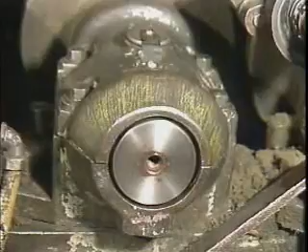Whenever movement takes place between surfaces that are in contact with each other, friction, or resistance to the movement, occurs. Friction between the moving parts of industrial equipment can cause excessive heat and wear. So lubrication is used to help reduce and control friction.

Lubrication is the act of applying a substance called a lubricant that creates a slippery barrier between surfaces that would otherwise come in contact. In this part, we'll look at some of the types of friction that can occur. We'll also look at different kinds of lubricants and describe various levels of lubrication.

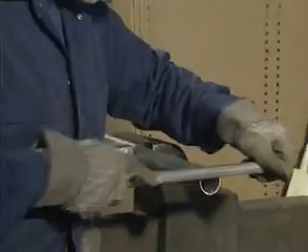Moving parts generally experience one or more of three basic types of friction: sliding, rolling, and fluid. Sliding friction occurs when one surface slides across another. This type of friction offers the most resistance to motion, so machines are usually built to minimize or eliminate it.

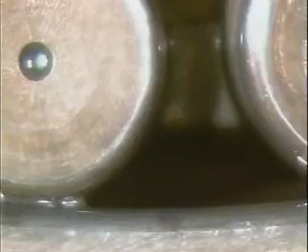One way of building a machine to minimize sliding friction is to place rolling elements between the moving surfaces. This is the principle behind rolling contact or anti-friction bearings. Although rolling contact bearings are used to reduce sliding friction, they do experience another type of friction, rolling friction.

Rolling friction is the resistance to motion that occurs when one object rolls over the surface of another. Rolling friction is considerably less severe than sliding friction, but rolling contact bearings must still be properly lubricated to reduce heat and wear.

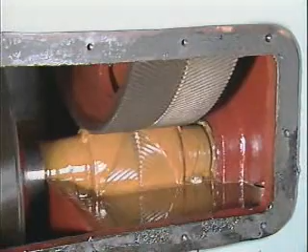Another way to reduce sliding friction is to separate two sliding surfaces with a film of lubricant. As long as the surfaces don't touch, sliding friction is eliminated. Some fluid friction exists within the lubricant, but it's much less than the sliding friction.

Fluid friction is the resistance to motion that exists in a fluid. For instance, fluid friction is what makes it difficult to walk rapidly in deep water. Three common kinds of lubricants are liquids, greases, and solids.

Liquid lubricants are oils. Mineral oils, which come from refined crude oil, and synthetic oils, which are man-made compounds, are commonly used in industrial applications. Greases aren't strictly liquid or solid. Instead, they typically soften when the temperature rises and stiffen when the temperature falls.

Solid lubricants are made from substances that retain their shape under normal conditions. Solid lubricants include some forms of metal, such as molybdenum disulfide, and several solid chemicals, such as graphite. When they act as a lubricant, the solid materials create layers that slide over one another. This reduces the friction that would occur if metal parts were in direct contact.

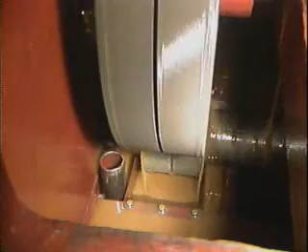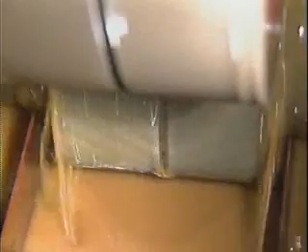Solid lubricants, such as the material whose trade name is Teflon, are also used as chemical coatings that prevent metal-to-metal contact by providing a solid covering for a metal surface. Chemical coatings are generally used in combination with another kind of lubricant. For example, if an oil film breaks down and allows two surfaces to come in contact, the chemical coatings provide backup lubrication.

Different levels of lubrication are possible. One level is no lubrication. When there's absolutely no lubricant between moving surfaces, the surfaces are dry. This condition causes the maximum friction between moving surfaces and should be avoided as much as possible, except for applications such as braking, in which maximum friction is desired.

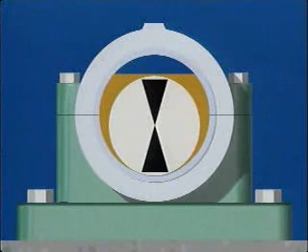Mixed film lubrication occurs when the mating surfaces are only partially lubricated, and metal-to-metal contact occurs between the high points of the surfaces that are moving across each other. Part of the load is relieved by the lubricant, but the high points of the mating surfaces take most of the load, which results in friction and wear of the surfaces. Mixed film lubrication is by no means an ideal situation, but it is a common occurrence.

A third level of lubrication is film lubrication, also called full film lubrication. It occurs when moving and stationary surfaces are separated by a film of oil. Film lubrication is the preferred level of lubrication for bearings. To see the basics of how film lubrication works, we'll use this illustration of a plain journal bearing.

The bearing has a sleeve that surrounds a shaft. The space between the bearing and the shaft contains lubricating oil. While the shaft's at rest, the weight of the shaft squeezes most of the oil out from between the shaft and the bearing. This places the bearing and the shaft in metal-to-metal contact.

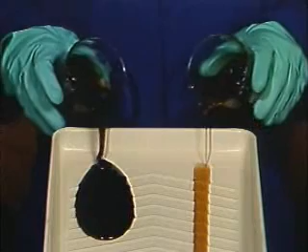The thicker lubricant has a greater resistance to flow, so it has a higher viscosity, while the thinner lubricant has less resistance to flow and therefore a relatively low viscosity. The thinner the lubricant, the lower the viscosity.

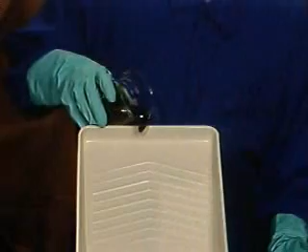Viscosity is affected by temperature. Higher temperatures cause lower viscosity because lubricants thin as temperature increases. On the other hand, lubricants thicken as temperature decreases. Both cases are significant because a lubricant won't lubricate properly if it's either too thick or too thin.

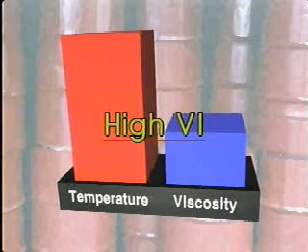If a lubricant is used where large changes in temperature occur, the lubricant's viscosity index is important. The viscosity index is a measure of the lubricant's viscosity change in relation to temperature change. If, when temperature changes a large amount, the lubricant's viscosity changes a small amount, the lubricant has a high viscosity index, or VI.

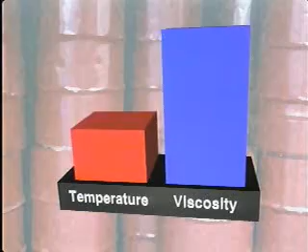If, when temperature changes a relatively small amount, the lubricant's viscosity changes a large amount, the lubricant has a low VI. Consequently, the temperature at which the viscosity measurement was obtained must be stated. This information is important because the same lubricant will have different viscosities at different temperatures.

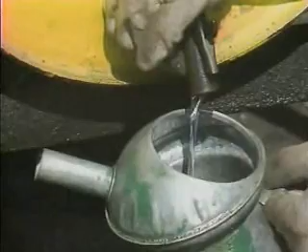In addition to viscosity, several other properties that affect lubricant performance are used by manufacturers as they develop lubricants for various applications. One of these properties is pour point. It's the lowest temperature at which a lubricant will pour or flow. Below the pour point, the lubricant will be too viscous or thick to flow by gravity.

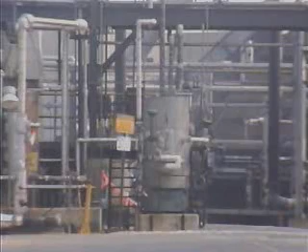A low pour point indicates that the lubricant flows at low temperatures. A high pour point indicates that the lubricant needs higher temperatures to flow. The pour point is especially critical in machinery that must run in cold weather and in equipment that's used in refrigeration systems.

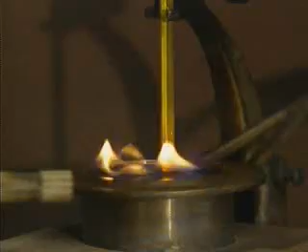Two other temperature-related properties of lubricants are flash point and fire point. The flash point of a lubricant is the lowest temperature at which the lubricant's vapor will ignite when it's exposed to a source of ignition. The fire point is the lowest temperature at which the lubricant will burn steadily when it's exposed to a source of ignition. This occurs because enough vapor is created to cause continuous burning. If either the flash point or the fire point is exceeded, a fire hazard exists.

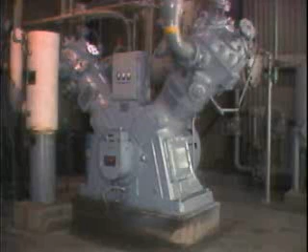Resistance to oxidation is another significant property of lubricants. It refers to a lubricant's resistance to reacting chemically with oxygen when exposed to heat and air. You see, many industrial lubricants are made from hydrocarbons. When the hydrocarbons are exposed to heat and air, the chemical reaction called oxidation occurs.

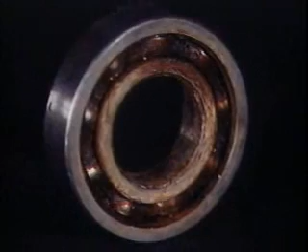Oxidation causes chemical changes that destroy a lubricant's effectiveness and lead to the creation of deposits such as sludge and varnish. Oxidation also produces acids that cause rust and corrosion. The oxidation process is normally slow, and over time, most lubricants do tend to oxidize. Oxidation can speed up, however, if the lubricant splashes around excessively or if it's exposed to high temperatures.

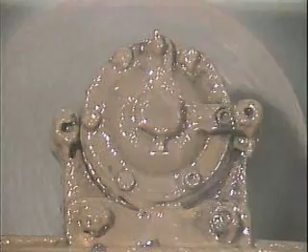A lubricant's resistance to forming an emulsion is also important. Basically, an emulsion is a mixture or suspension of components that are difficult to separate once they've been combined. The process that causes the formation of an emulsion is called emulsification. A lubricant that resists forming an emulsion is usually desirable because an emulsion of lubricant and water has poor lubricating qualities.

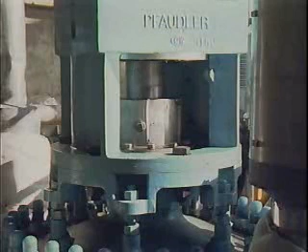Equipment manufacturers generally specify appropriate lubricants for their equipment, depending on how the equipment will be used. In turn, workers are responsible for making sure that they use the type of lubricant that's been specified. Various factors determine the appropriate lubricant for a given situation. For instance, pressure or load affects the selection of a lubricant. An application with relatively high pressure requires a lubricant that won't flow away from where it's needed when the pressure increases, such as when gear teeth mesh.

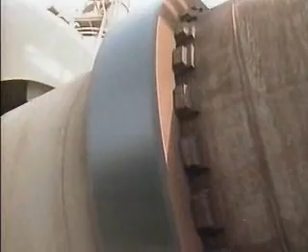Applications that involve relatively high loads or pressures typically require greases, solid lubricants, or high viscosity oils. Speed is also a factor in lubricant selection because there's a higher rate of wear at high speeds than at low speeds. Generally, low viscosity oils provide lower friction and better heat transfer at high operating speeds than high viscosity oils do.

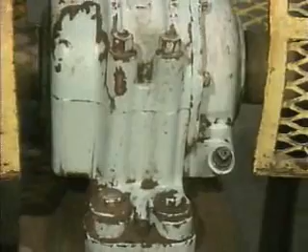In short, low viscosity lubricants are more suitable for components such as certain bearings where the loads are light, the speeds are high, and the system is fully enclosed. High viscosity lubricants are more suitable for components such as open gears where the speeds are low, the loads are high, and the system is not enclosed.

Temperature also affects a lubricant's viscosity. If wide, rapid variations in temperature are involved, a lubricant with a high viscosity index is usually needed. Temperatures must not exceed the lubricant's flash point and fire point. On the other hand, temperatures must not be lower than the lubricant's pour point.

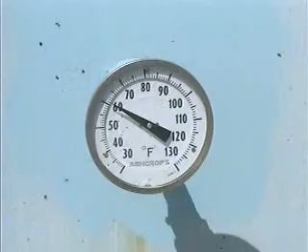Substances or conditions in the environment where a lubricant will be used also affect lubricant performance. For example, a lubricant must be able to withstand chemicals that may tend to break down the lubricant. And if there's water in a system, a lubricant that resists emulsification is usually required.

In most cases, lubricants contain additives which also affect lubricant selection. An additive is a substance that's added to a lubricant to provide or improve a specific property. Such substances are usually added by the lubricant manufacturer.

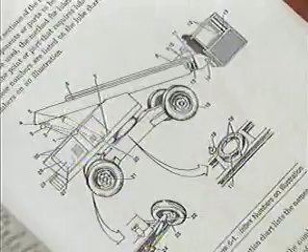To make sure that they use the correct lubricant for a specific piece of equipment, workers usually refer to the lubrication chart that's supplied by the equipment manufacturer. The lubrication chart applies only to that particular piece of equipment, and it should not be used as a lubrication guide for any other equipment.

Often, each lube point or equipment part that requires lubrication, as indicated on the lubrication chart, is shown and numbered on an illustration that accompanies the chart. In turn, the numbers from the illustration are listed on the lubrication chart, in this case, in the index numbers column. For instance, item number 2 from this illustration is identified as the boom pivot shaft on this simplified lubrication chart.

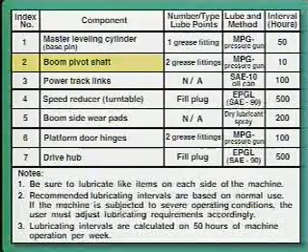Reading across that line on the chart, you can find the number and type of lube points. In this case, 2 grease fittings, and the recommended type of lubricant and method of application. In this case, multi-purpose grease, abbreviated as MPG, applied with a pressurized grease gun or pressure gun. You can also find out how frequently the boom pivot shaft should be lubricated, which is every 10 hours.

Proper storage of lubricants is essential to prevent contamination and unnecessary waste of the lubricants, as well as fires, spills, and accidents. For these reasons, the federal government and many state governments have strict regulations that apply to the storage and handling of lubricants. In this part, we'll cover some basic procedures for ensuring that lubricants are stored safely.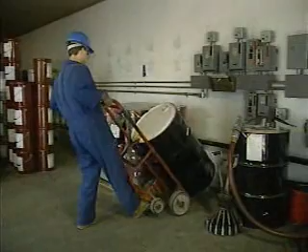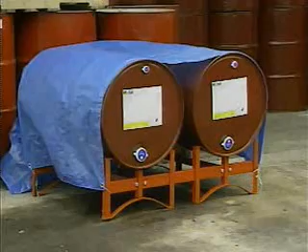After lubricants have been delivered, they're often stored in their containers for a long time before they're used. Depending on a facility's available space, the containers may be stored indoors or outdoors. Two major problems with outside storage are dirt and weather. So store lubricants in a location where there's a minimum of dust and dirt. Also, use a temporary covering like a tarp or a permanent covering like this three-sided shed to protect the containers from the weather.

Generally, metal drums of lubricant should be stored either upright on pallets or horizontally on racks that keep the containers off of the ground. You see, storing a metal drum on a rack keeps the metal of the drum from contacting the ground or standing water. This helps prevent the destructive chemical reaction of corrosion from occurring.

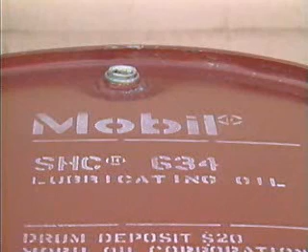In addition, storing a drum on its side prevents water from collecting on the top of the drum. Water that's allowed to collect here can eventually penetrate the seal around the drum's opening and contaminate the lubricant that's inside the container.

Most lubricants are combustible, which makes fire a hazard that's associated with storing these materials. One reason for storing lubricants outdoors is to minimize the damage from a fire by keeping the lubricants away from buildings, equipment, and work, such as welding or cutting, that involve sparks or open flames. Also, always keep an appropriate type of fire extinguisher in the storage area.

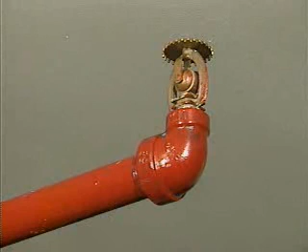When lubricants are stored indoors, weather is less of a problem than with outdoor storage. But contamination, spills, and fire are still hazards that must be dealt with. Store lubricants in a fireproof room or building that's clean, well lighted, and well ventilated. The storage area should have a fire extinguishing system that can be controlled manually as well as automatically. Also, keep an appropriate type of portable fire extinguisher in the storage room.

Position storage racks or shelves so that all lubricants can be reached easily. Make sure that all containers are plainly marked to identify their contents and store the containers so that their markings can be clearly seen. If possible, store opened lubricant containers and containers of contaminated lubricants separately from new unopened containers.

To dispense lubricant from a drum by gravity flow, store the drum in the horizontal position on a rack and equip the drum with a spigot that has a drip-proof valve for withdrawing the lubricant. If you must store a drum in the vertical position, you'll probably have to pump the lubricant out of the drum. Store cans or pails of lubricant neatly on shelves or on the floor. Finally, repair leaks promptly and clean up any drips or spills immediately.

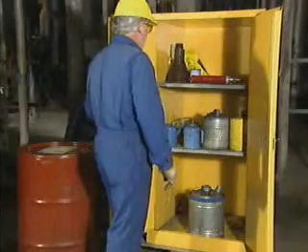In this part, we'll look at common types of lubrication equipment for industrial applications. We'll begin with a grease gun. Hand-operated grease guns, or lever guns, are often used to grease bearings. Typically, the nozzle end of the gun is attached to a grease fitting on the bearing housing, and the gun's hand lever is pumped to apply grease through the fitting to the equipment's bearings. Grease guns enable you to develop high pumping pressure with little effort.

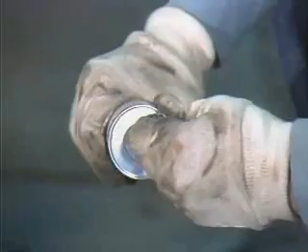In fact, grease guns can develop pressures in excess of 10,000 psi, which can damage seals. So you must operate grease guns with care. A very common way of filling some hand-operated grease guns is simply to slip a cartridge of grease into the barrel of the gun. Other types of grease guns can be filled quickly and easily with a filler pump that's clamped onto a bulk grease container, then attached to the gun.

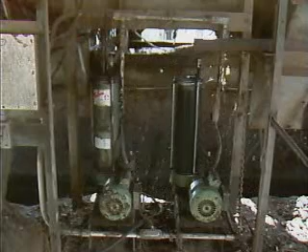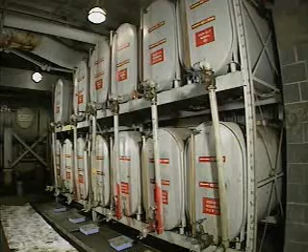In this part, we'll talk about some standard procedures and precautions that are associated with handling and dispensing lubricants. Generally, when a lubricant is needed in a facility, workers move the lubricant containers from bulk storage to a central location in the facility where the lubricant can be dispensed. If a lubricant is taken from outside storage in cold weather, it should be allowed to warm up indoors before it's used. Low temperatures can thicken lubricants and make them unusable until they've been thoroughly warmed.

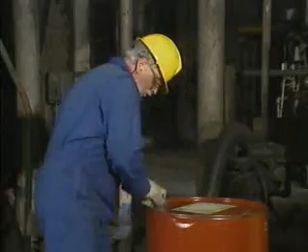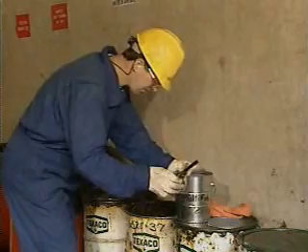As a rule, a lubricant container should be cleaned before it's opened to prevent dirt or debris from the container getting into the lubricant. When a container is opened and lubricant is removed, the container should be resealed as soon as possible to protect the remaining lubricant from contamination. Different lubricants may have incompatible additives, so when a lubricant is added to a partially full system, the type of lubricant that's added must usually be the same as the type of lubricant that's already present.

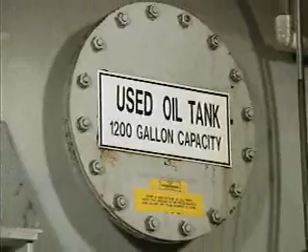When more than one lubricant is dispensed from the same location in a facility, it's important to identify each lubricant properly. Of course, the original shipping container must clearly state what lubricant the container holds. But any time a lubricant is placed in another container, the new container must also be clearly and correctly labeled. Lubricant should never be returned to its original container after it's been removed. That could contaminate the entire contents of the container. Likewise, contaminated or waste lubricant storage must be clearly marked.

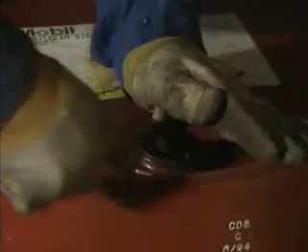Different methods can be used to remove or dispense lubricants from their containers so that the lubricants can be put to use. We'll look at two of the most common methods for dispensing oil. One way to dispense oil from a drum or a barrel is to use a barrel pump that fits into the container. The first step in installing a barrel pump is to clean off the top of the drum. Then open the drum, and if there's a drum seal, remove it. Next, clean the pump and insert it into the drum. And finally, tighten the pump securely to the drum.

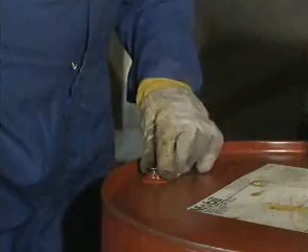For the barrel pump to work properly, the drum must be vented. This is usually done by removing a small vent cap from the top of the drum before you start to pump. When you're done pumping, replace the vent cap to prevent contamination of the lubricant.

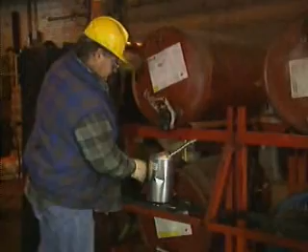Another way to dispense oil from a drum is with a spigot that has a leak-proof valve. The drum must be positioned on its side. Sometimes, a drum with a spigot is placed in a rocking frame. To dispense oil from the drum, the frame is rocked forward so the drum lies on its side. The drum may then be left in this position until it's empty, or if necessary, it can be rocked back into the upright position. With the drum vented, open the spigot and withdraw the oil from the drum. When the desired amount of oil has been withdrawn, close the spigot and the vent cap.

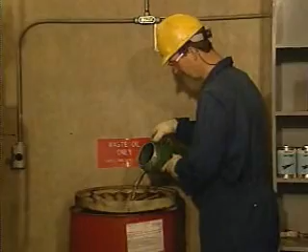When lubricating oil becomes contaminated or can no longer provide adequate lubrication, it must be replaced with fresh oil. Oil is usually changed according to a schedule that's established by the equipment manufacturer. Also, in many cases, contaminated oil can be purified and reused. Oils are often divided into several common groups based on the uses for which the oils are suitable.

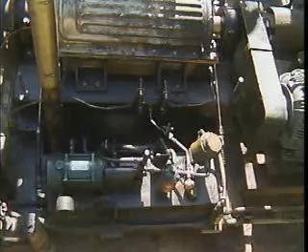One group of oils is circulating oil. Circulating oil flows or circulates through a piping system or moves freely within a closed area. The circulating oil group also includes hydraulic oil. Hydraulic oil is primarily used to transfer force from one component to another in a system. Sometimes, though, the same circulating oil is used for both lubrication and hydraulics. For example, large steam turbines are often built to use the same oil for lubrication and for hydraulic control.

In equipment that's operated in low temperatures, a circulating oil's pour point must be low enough to allow the oil to flow freely. Also, the viscosity index of a circulating oil is very important if the system in which the oil is used experiences large changes in temperature.

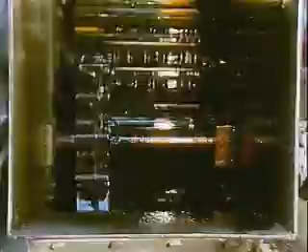Gear oil is a type of oil that's used primarily for lubricating gears, although it may be used to lubricate many other devices as well. Various gear oils are available. A gear oil may be a straight mineral oil, or it may contain additives to improve the oil's load-carrying ability and its performance in high-pressure applications.

Viscosity is a critical property for gear oil because an oil that's too thin will be squeezed out from between the gear teeth and won't protect them. But the oil must also be able to flow freely enough to help cool the gears. An oil that's too thick will cause the gears to overheat because of high fluid friction.

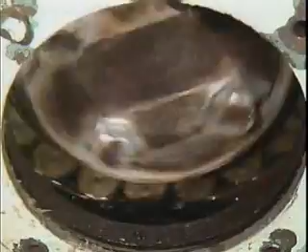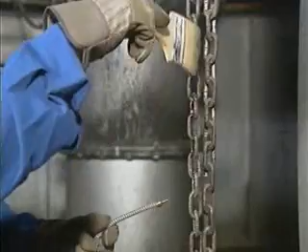Manual oiling often involves wiping or brushing oil onto moving parts, such as chains and wire rope. To prevent personal injury when applying lubricants manually, workers must always use the appropriate personal protective gear. Workers must also make sure that the equipment is shut down and properly tagged and locked out before they apply the lubricant.

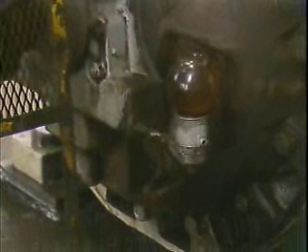Some bearings have a small oil cup or reservoir that dispenses oil automatically as the oil level in the bearing decreases. To maintain the proper oil level in the bearing, workers must check the level in the oil cup regularly and add oil as necessary. The oil cup should be cleaned before it's used. Dust and dirt that enter the bearing with the oil can lead to bearing failure.

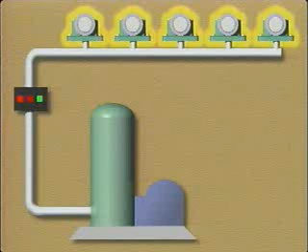Centralized oiling is a lubrication method in which oil is automatically applied to the moving parts of several machines by an independent, centralized oiling system, such as the one illustrated here. But to be sure that the proper oil level is maintained, workers must check the level in the reservoir on a regular basis and add oil when necessary.

Finally, applying oil to lubricate bearings is a critical maintenance task in most industrial facilities. One of the most common problems associated with lubricating bearings is over-lubrication. The application of too much lubricant can cause an increase in operating temperature and a decrease in viscosity. Then, if the lubricant becomes too thin, it can't carry the load inside the bearing. As a result, the bearing will fail and have to be replaced.

Also, too much lubricant being forced into a bearing may burst the bearing seals. This in turn allows the lubricant to escape from the bearing while contaminants are allowed to enter.

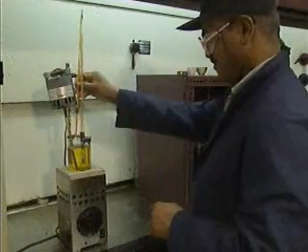Certain properties unique to grease determine the appropriate grease for a particular application. One such property is drop point. Drop point refers specifically to the melting point of a grease. The term is derived from the method that's used to measure this property. The grease is heated slowly until fluid begins to drop from the grease. The temperature at which the drops form is the drop point.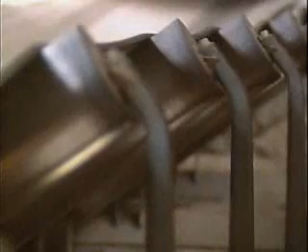If the operating temperature in an area is higher than a grease's drop point, the grease tends to flow away from the area that needs lubrication. So a grease's drop point is normally considered the highest temperature at which the grease can be used. Some greases don't have a drop point. Instead, when heat is applied, the grease begins to decompose chemically before it reaches the point where the thickener in the grease would break down and drops would form.

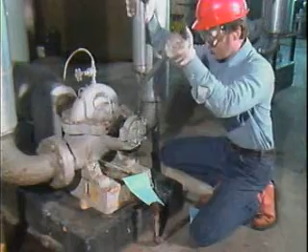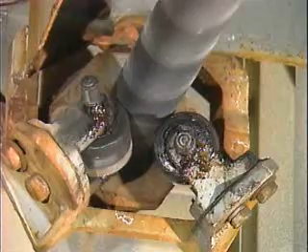A grease's consistency or stiffness is an important physical property for much the same reason as drop point is. If a grease is too hard, it will be difficult to apply. But if it's too soft, it may flow away from where it's needed. Either of these situations could result in inadequate lubrication and damaged equipment. The consistency of a grease varies with temperature, and there's generally an increase in the softening of a grease as the temperature increases. For these reasons, consistency is a critical property to consider when grease is selected for a particular application.

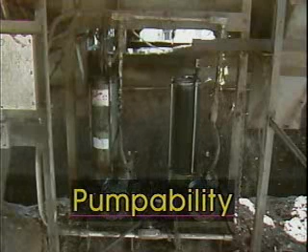The National Lubricating Grease Institute, NLGI, has developed a widely used classification system of grease consistencies. In this system, grease consistencies are designated by NLGI numbers that range from 000 for the softest to 6 for the stiffest. If a grease must be pumped through a centralized greasing system, the grease's pumpability should be considered. Pumpability is a measure of how easily a grease can be moved or pumped through a centralized greasing system without clogging the pipes or the components in the system.

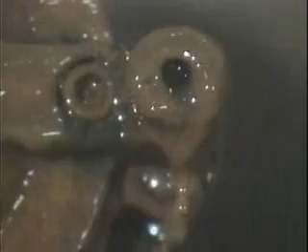The water resistance of a grease is an important property if the grease will be used with machinery that can be damaged by water. Many greases break down or dissolve when they come in contact with water, but most greases that contain thickeners such as calcium or lithium soap, which are insoluble in water, resist water very well.

The ability of a grease to retain its chemical and physical properties when subjected to extreme temperatures or exposed to reactive substances is referred to as the grease's stability. In many applications, it's crucial to use a stable grease to protect the equipment that's being lubricated. Bearing applications are especially sensitive to instability.

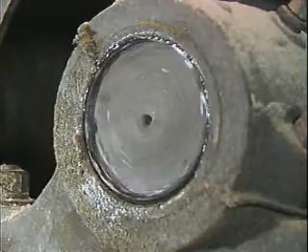If the grease in a bearing breaks down from the heat that's generated during operation, the grease will leak out and leave the bearing dry, causing the bearing to seize. A stable grease, on the other hand, resists breaking down due to temperature increases or exposure to air, water, or reactive chemicals.

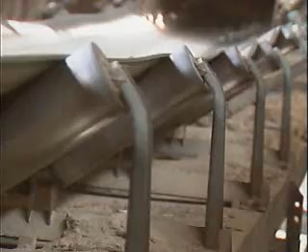There are various reasons for using grease, most of which depend on the operating conditions in a given situation. Under certain conditions, grease may be necessary to ensure that the lubricant will stay in place. As long as grease remains semi-solid, it tends to stay where it's put. Oil is much more likely to flow away from where it's needed than grease is.

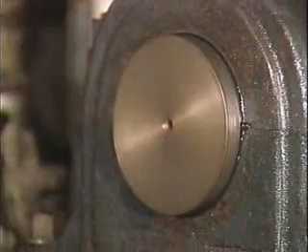Even when both oil and grease would flow out of an area, it's much easier to retain grease with a seal than it is to retain oil. Keeping the lubricant in place is important because leaking lubricant could contaminate surrounding areas or cause a fire hazard. Another reason for using grease is that grease may be required to assure that contaminants are prevented from getting between lubricating surfaces.

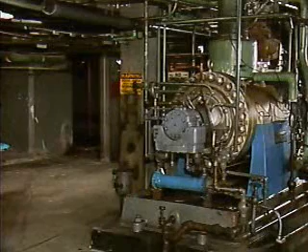In some high-temperature applications, such as this conveying dryer, grease with a high-temperature thickener is used to keep the lubricant in place. It's possible to use oil in high-temperature situations, but additional equipment, such as this cooler, must usually be provided to cool the oil.

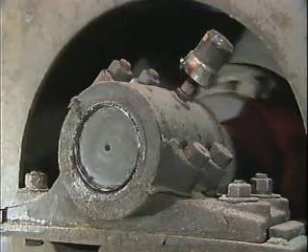Greases are also used to lubricate bearings in low-speed applications that don't generate much heat. Grease is frequently used when the running speed of a plain journal bearing doesn't exceed 200 to 300 revolutions per minute, or RPM. Finally, lubrication doesn't have to be done as often with grease as it does with oil. So grease is commonly used in situations where frequent oil lubrication is difficult to accomplish.

In this part, we'll look at some typical examples of how to apply grease for proper lubrication of industrial equipment. Sometimes workers apply grease manually with a brush, clean cloth, or their gloved hands. The workers must use the required personal protective gear and make sure that the equipment is turned off, locked out, and tagged before they apply the grease.

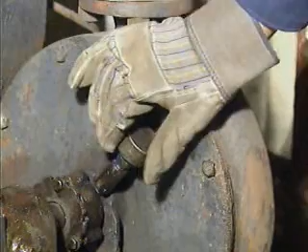Sometimes workers apply grease to operating equipment by turning a screw-type cup to force grease into a component, such as a bearing. The level of grease in the cup must be checked regularly. If the level is low, the cup must be refilled.

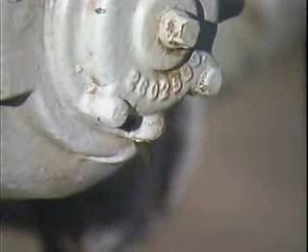Anti-friction bearings often have housings that retain grease and help keep out dirt. But a problem can occur if too much grease is put into the bearing, because there's no place for the excess grease to go. Consequently, a way for old grease to leave the bearing must be provided. In this example, the housing has a drain hole. To prepare to grease the bearing, remove the plug from the drain hole and wipe the grease fitting clean.

Then, connect the grease gun to the fitting and slowly add the specified amount of new grease while the machine is running. Don't overgrease the bearing. Typically, with a hand-operated grease gun, you should apply no more than 3 shots of grease at a time. Next, disconnect the grease gun from the fitting and wipe the fitting clean.

Then, allow the machine to run for a few minutes with the drain plug still removed. As the machine operates, excess grease will be forced out of the drain hole. After a few minutes, wipe the drain plug clean and put it back in the drain hole.

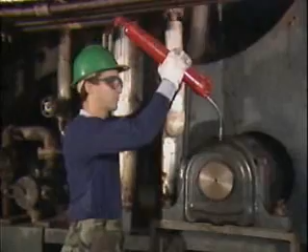Greasing a sliding surface bearing, such as this plain journal bearing, is a relatively simple procedure because the design of the bearing housing doesn't cause grease to be retained in the housing. The usual practice is to apply grease to a grease fitting on the housing with a grease gun while the equipment's shaft is turning. This procedure is generally continued until new grease is forced out of both ends of the bearing. Any excess grease will rapidly work its way out.

In this topic, we talked about oils and greases and some of the different methods for lubricating equipment with these types of lubricants. To check your understanding of the material that we covered, try answering some practice questions.